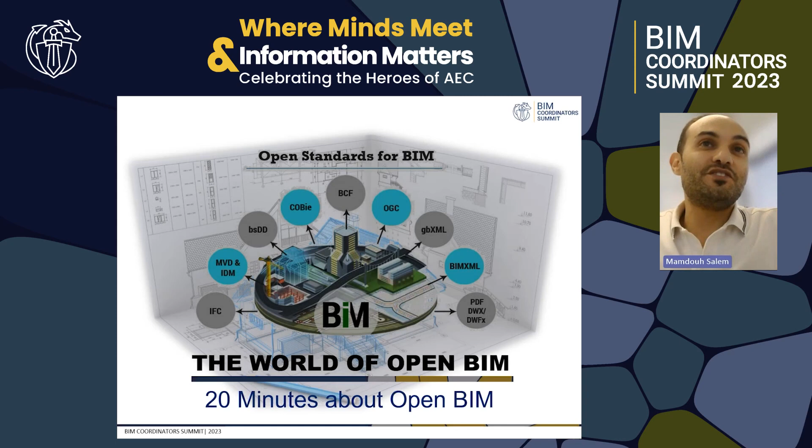My name is Mamdouh Salem. I'm acting as a BIM champion for Group Amana for the corporate, and honored to be representing the BIM coordinators community in the UAE, United Arab Emirates, as a BIM ambassador for them in the country here.

I'm an architect in discipline. However, I have 17 years of experience in the AEC industry. I have been working for BIM management for the last 10 years and have some related accreditations such as PMP, CAN-BIM, ISO 19650 as a BIM manager and digital delivery manager, and level 2 BIM maturity.

And I have been working for many contractors for the last 10 years as a BIM manager, as a BIM coordinator, as a head of BIM as of now. And I have achieved a lot of challenges with my team, brought a lot of positive opportunity to the companies that I have worked for.

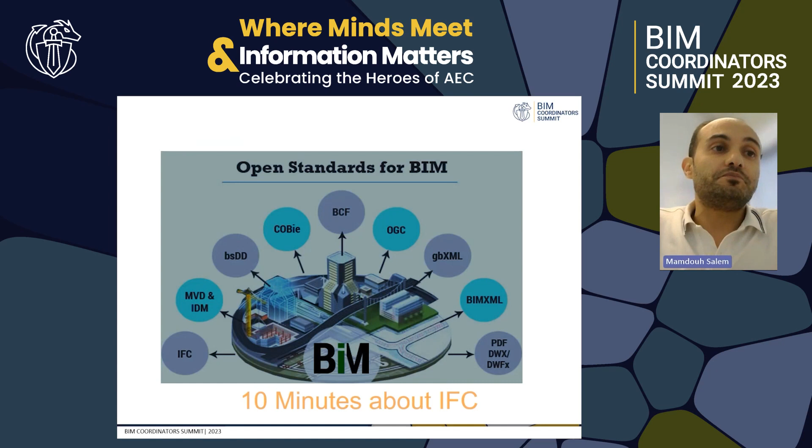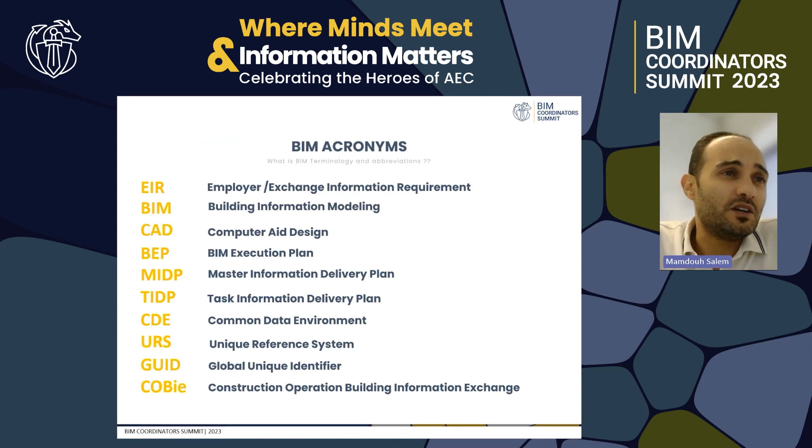First, I think, as usual, we need to know some acronyms that you might already know. However, some of them are related to our presentation today. Please explore it. We don't have that much time, just 15 minutes to finish, so I'll keep that to read it after the session.

As demonstrated, we have a lot of data that needs to be exchanged as shown here, using different formats, using different platforms, and different stages and different purposes of use. Some of the platforms will be used during the planning stage, such as the Microsoft package, as an example.

Some of these platforms we use during the design stage or authoring. We call it authoring, like Revit, Tekla, ArchiCAD, and a lot of platforms. Another platform for analysis might be used during the design or after the design, during coordination and during execution. For coordination and execution we need to use Solibri, BIM 360, Navisworks for the analysis, Vico for cost, and for 4D simulation, Synchro, Vico for cost again, and a lot of different software.

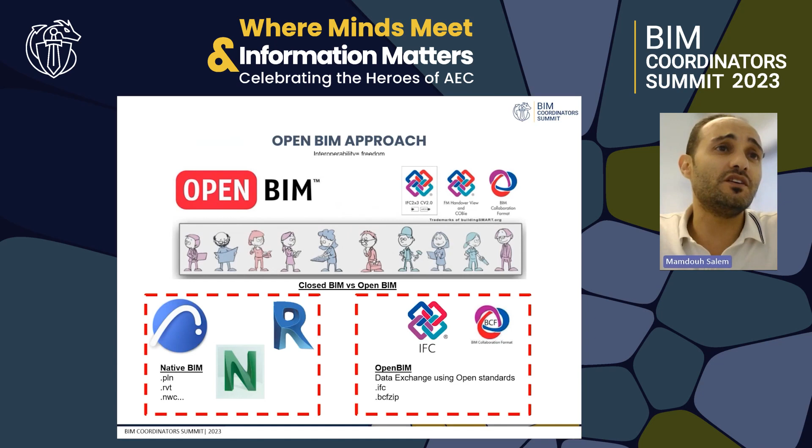So we have the authoring application or the native file communicating internally. The Revit file, RVT, is communicating with the Revit environment. The PLN or the ArchiCAD file communicating with ArchiCAD. But if I want the ArchiCAD to communicate with the Revit, that means the solution is IFC. That's why this data exchange uses the Open BIM standard.

The IFC has been developed, then published by buildingSMART. We can call that the home of BIM interoperability internationally. By the way, it is a non-profit organization that supports the Open BIM methodology and concept.

They started in 1997, if I remember, to publish IFC number 1. Then they developed and improved that a lot until the moment. The updated version is now IFC4, but the commonly used version and the stable one, for me at least, is IFC 2x3.

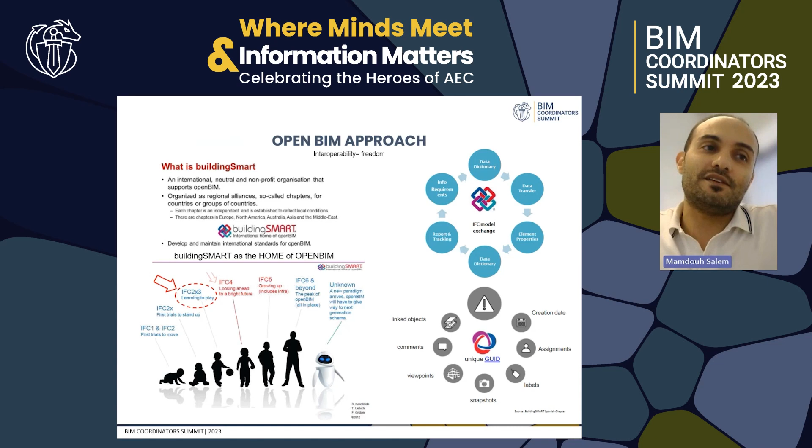The prospective version in the future will be IFC 5 and 6, etc. That will support, as I read, machine learning and other technology.

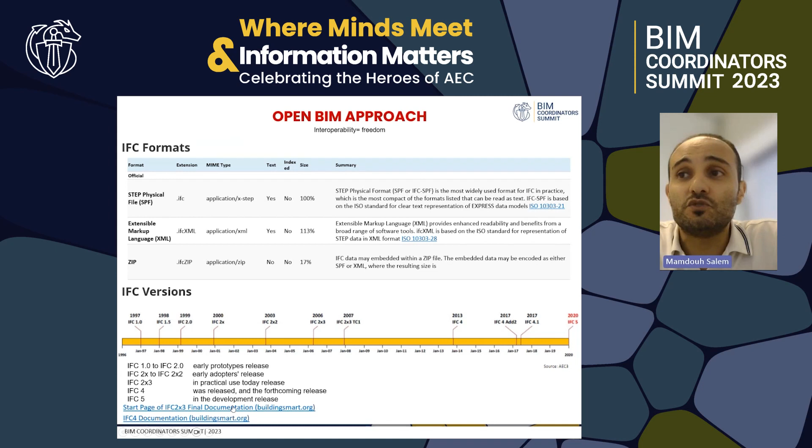Here's also the format and the difference between each format and the other, as well as the heritage of IFC and its history until today. Also, I recommend exploring the links below here. That will be helpful to understand the whole story about the IFC.

This slide here shows some of the platforms that use IFC. Those platforms are mostly authoring platforms, and those are free platforms. You can use it, it is good, and you can explore IFC free of charge. So it will be good to explore some of them. Personally, I like BIMcollab Zoom, and BIMvision. This is personal, but you might have another idea.

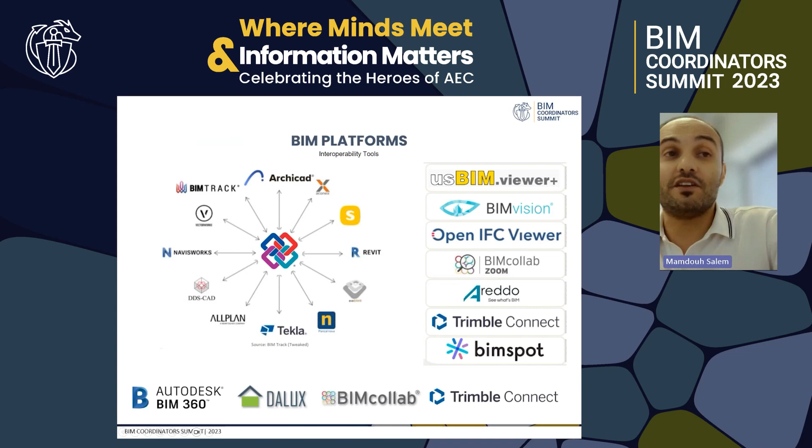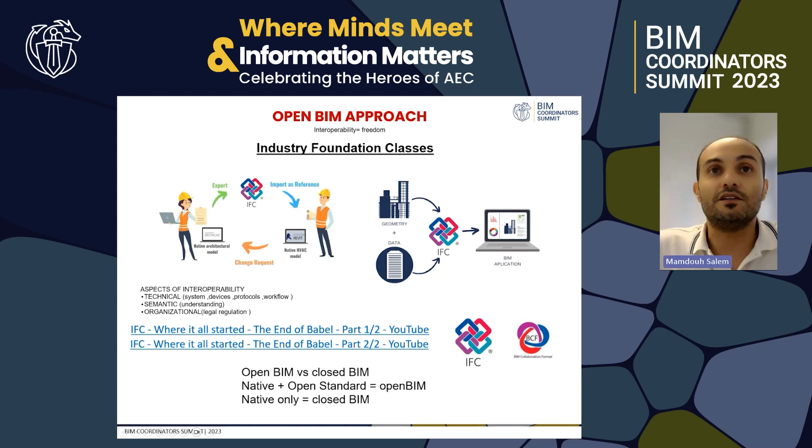Native file, or closed format as we call it, requires compatible software. So I highly recommend watching those videos here - the links are provided.

It is helpful to understand and go deeply, because we don't have time and the time is limited here. I have 5 minutes to finish, so I just want to give you a brief about COBie and the detail.

The challenge was to have organized information, and to be searchable, accessible, accurate, useful, valuable. That was due to cost implications of the analog way. So we decided to change the way - not me, but the scientists.

But first of all, you need to classify everything. You have a lot of alternatives to classify it based on the location and based on the BIM execution plan. You need to decide that with the client, or the client might have pre-decided already in the client's EIR.

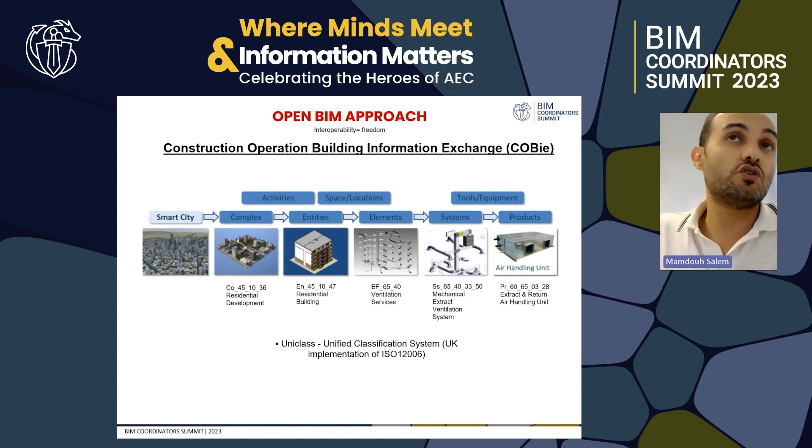Then you need to understand first what is COBie. COBie is simply the approach for collecting and sorting project information during design and construction, to be reused during the FM phase.

It is easy to use, as it is a spreadsheet that can exchange information easily with the FM database and the building information model. So you can capture the required O&M data as it is created, and do not rely on post-construction surveys and audits as is in the current practice.

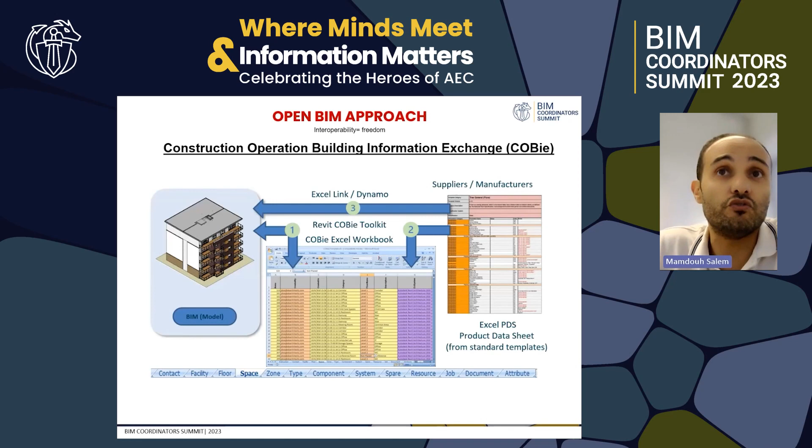A lot of platforms and developers, like Autodesk for example, have now developed applications to extract COBie easily from their authoring application. I think in Autodesk they call it the BIM Interoperability Tool. It includes a lot of features, and I highly recommend using it.

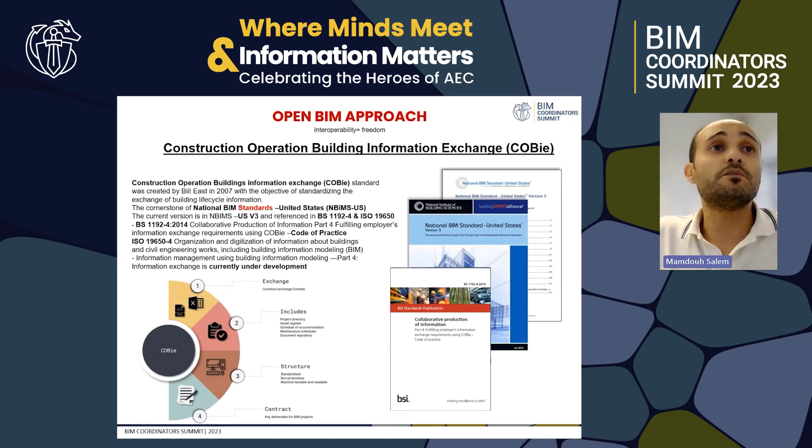But the most important thing I want you today to know, as a beginner using COBie and IFC, is that you always need to know when and where every piece of information is supposed to be fed. You should know that during the design, all this information needs to be filled.

And during the construction, you need to fill some of the information - this is based on the stage. That means the designer has some liability to provide certain information, and the contractor as well, and some is related to the client himself. So you need to understand that.

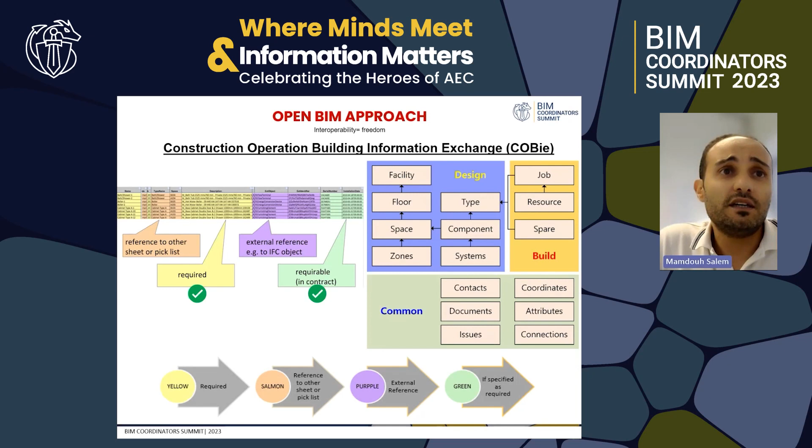You need to know where and when, and it's supposed to be part of the BIM execution plan, to demonstrate everything.

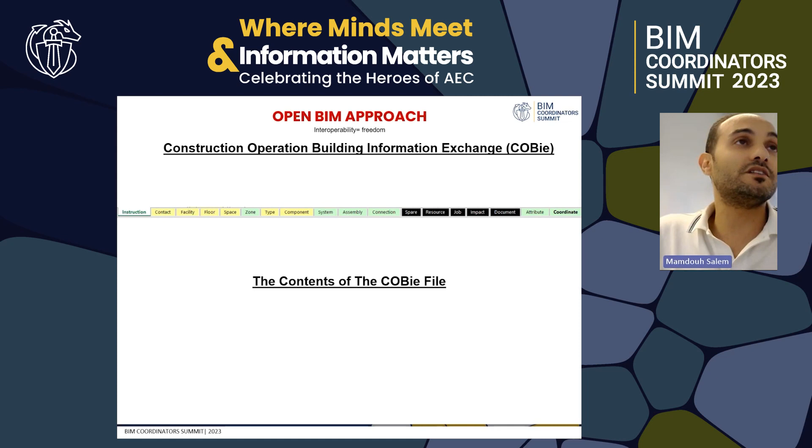Also, let us explore in a minute what is the spreadsheet and its content. First, you need to understand that there is correlation between the content and the sheets.

So if you fill the information of the facility, it will affect all the spreadsheets. For example, the types describe the component. The floor - or in our terminology we call it the floor, but in some software they call it level - this affects the space, and the zone also describes the spaces. So all are in correlation together.

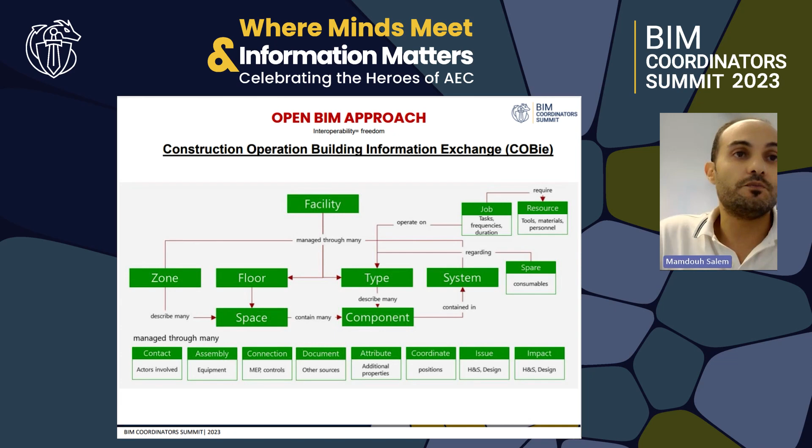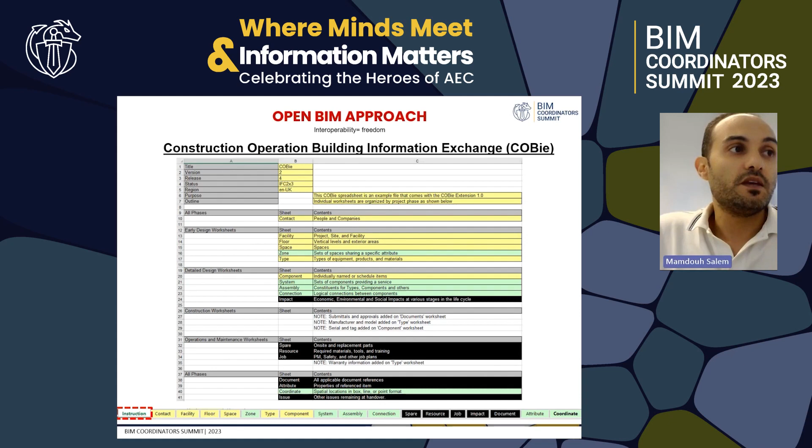You will find the contacts related to the project, the facility and information about the facility, the floor or levels, and some parameters. All these parameters come from the model you have - the spaces, or whatever you can call it, rooms from the architecture point of view, or spaces from the MEP point of view, zones. If you have, for example, fire zones or something like this, you need to decide it at the beginning.

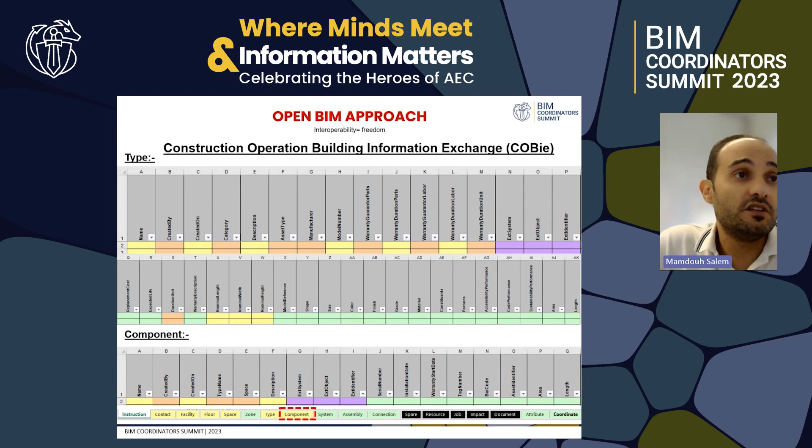Also here, the other tabs - I'm showing the tabs here, okay. The type here, those are the types, and the component - those are the parameters that need to be filled in the component. And the system - whatever HVAC system, the piping system you have.

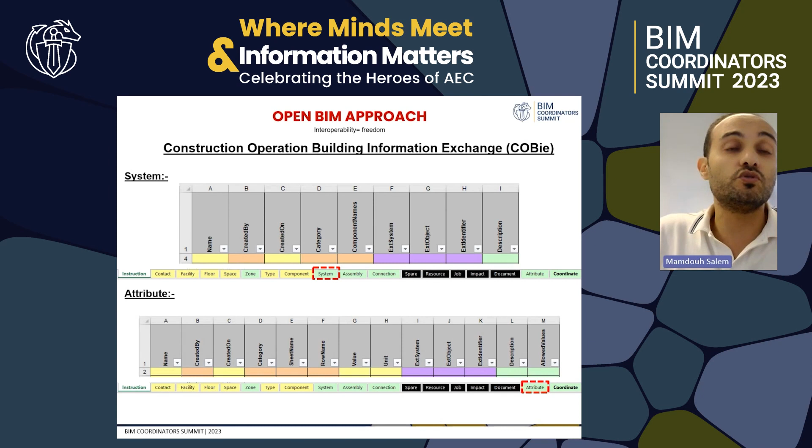The attributes are the remaining parameters inside your model which are not shown in the component or the type as a parameter. You need to show some parameters, so the parameters here are the attributes.